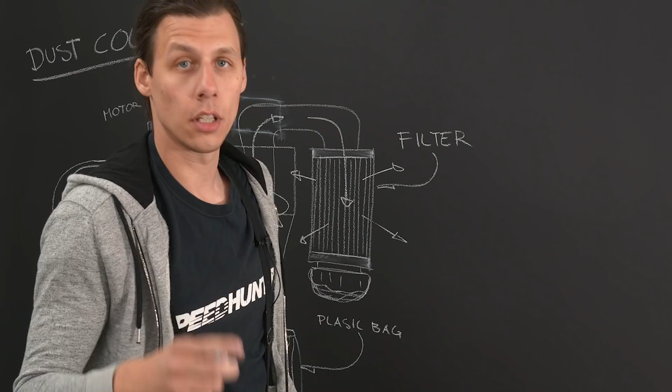Okay, so let's have a look at our dust collector setup and how we're gonna build it. I've tried to sketch out a rough layout of how this is gonna look.

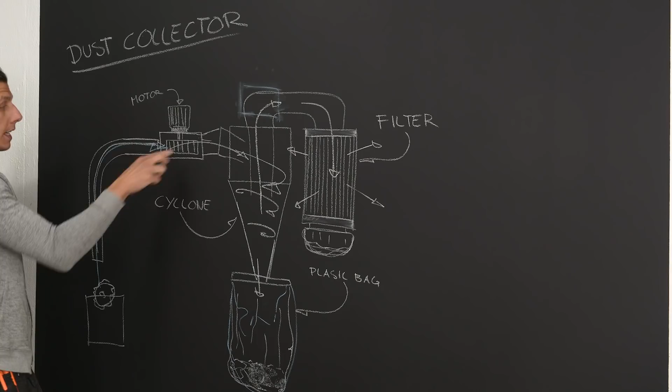The way our setup is gonna work is that down here we have a nice illustration of a table saw. The table saw generates dust, and that dust gets sucked up into the motor, which has a big steel-bladed fan on it. That fan then shoves all the dust particles into what's gonna be a dust cyclone, which we're gonna build, and we'll talk about that more later.

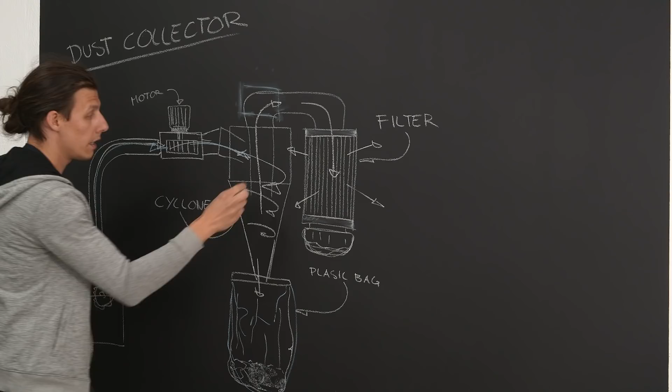The dust cyclone's job is to separate the particles from the air. It does that by spinning it around in circles, and then all the dust particles get pushed out to the wall and fall into a bag underneath.

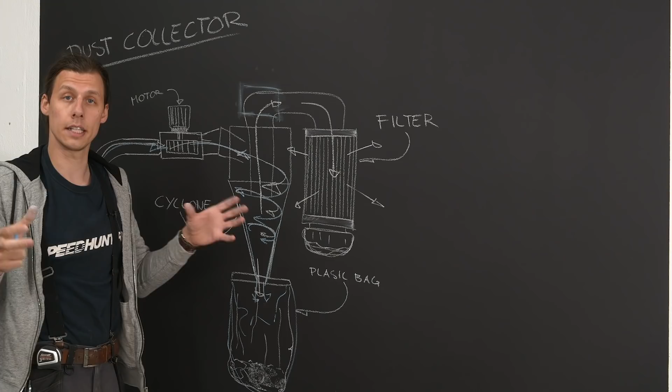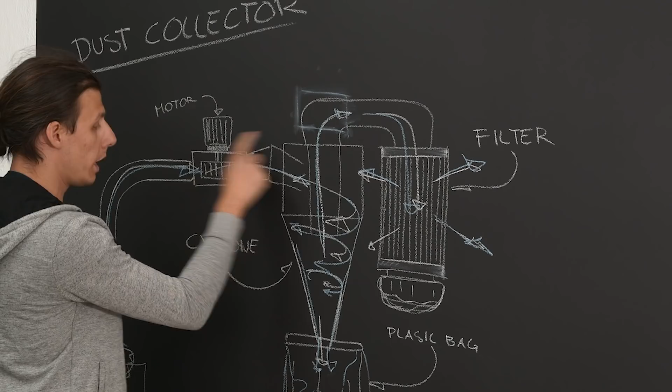The clean air in the middle of this contraption gets sucked up and forced into a big filter. All the really fine particles that make their way through the system and into the filter get filtered out right there, and they fall into this bag at the bottom here.

So then when the whole system is full, all we have to do is take off this bag and replace it with an empty one.

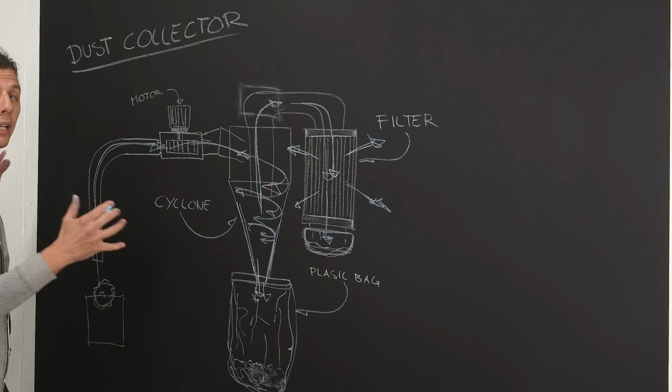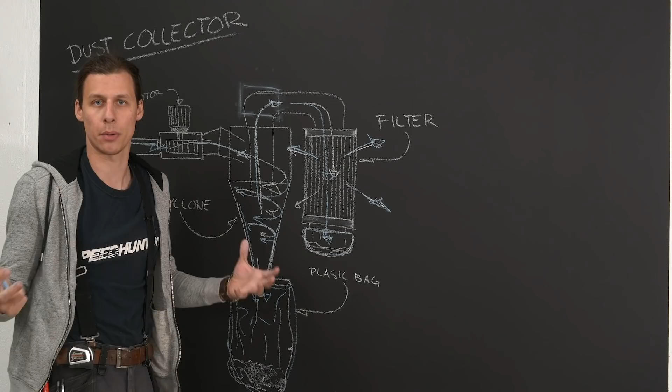We're gonna build it big enough so it can support our needs right now and hopefully all our future needs, with machines we might buy like a planer or other things that generate a lot of dust. Now that we know roughly how this is gonna work, let's look at the parts we have to work with. I'll show you a quick summary of how we're gonna build this.

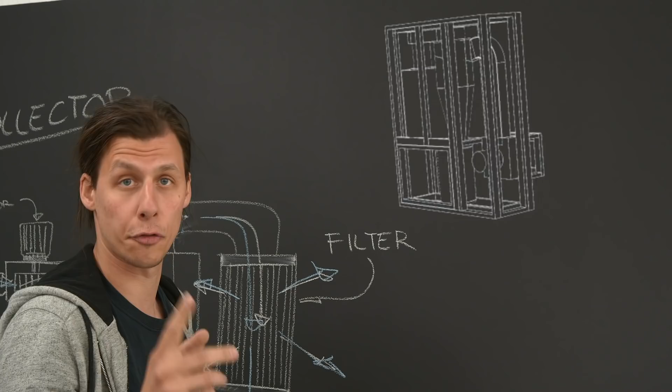We can divide the entire project into two parts. Let me show you. The first part is the frame and structure that holds everything, and the second part is all the special pieces inside that we need to fabricate.

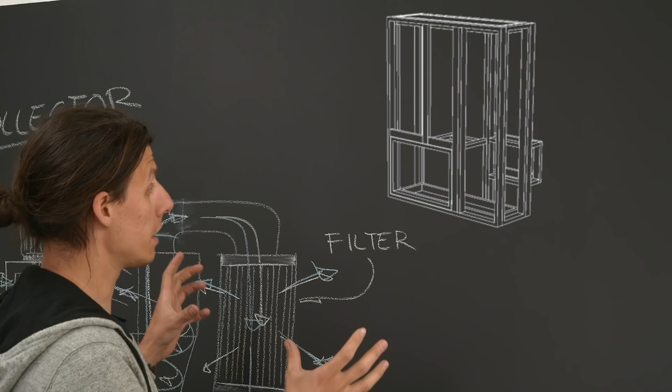The frame and everything you see right here is built out of 2x4s with sheet goods on the sides and insulation on the inside. That part I can build here, but there's a couple of pieces inside that I need to custom build for this project.

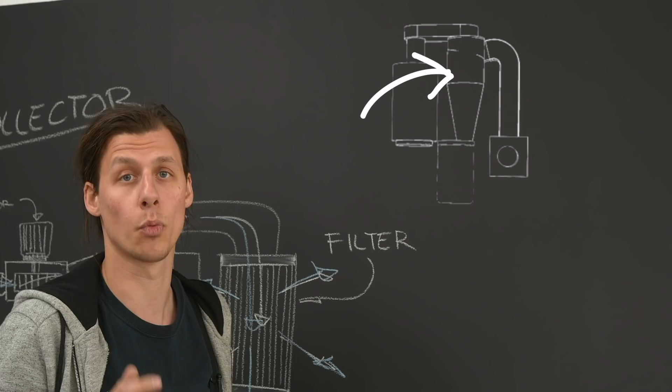One of those parts is the dust cyclone, which is built out of sheet goods, bent and welded together. I don't really have the facilities to build that here, so I'm gonna build that part at school, and then we'll bring all the parts back here and assemble them, and hopefully everything should fit together.

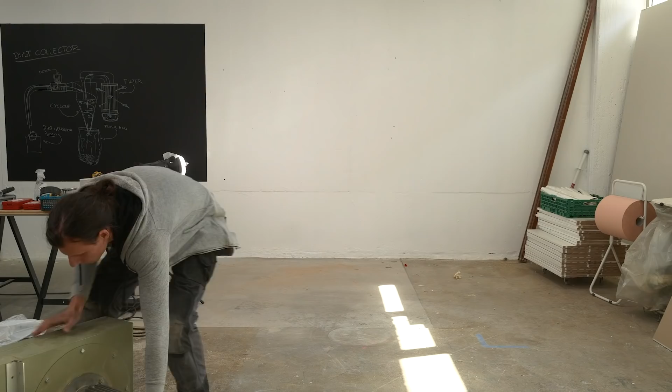Okay, so these are the parts that we've got to work with. This ginormous thing is half of an old dust extractor.

It came with a base that Simon and Lucian have now converted into a work table. What this used to be was just a massive motor with a fan in it.

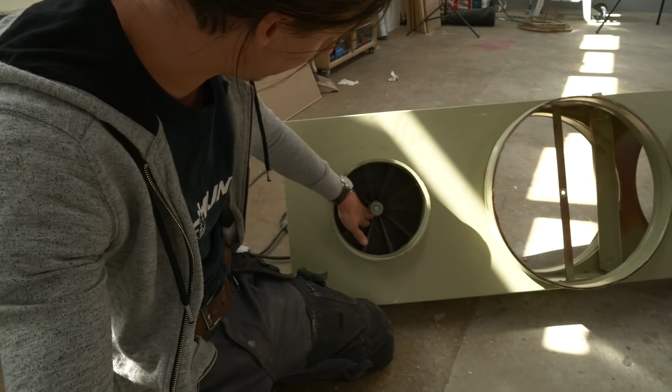So this big motor on the backside is directly connected to a big metal fan that sucks in the air and pushes it out through the side here.

Actually, that part of this entire box is the only thing we'll end up needing. We're gonna cut it off right here and just use the motor housing portion of this frame in our setup.

We're also gonna cut off a couple of these rings because they're super convenient, and we're gonna mount them to the bottom side of the filter and the cyclone to strap our waste bags to. We also bought one of these giant filters, and they're gonna be doing the filtration of the air to take out the very fine particles.

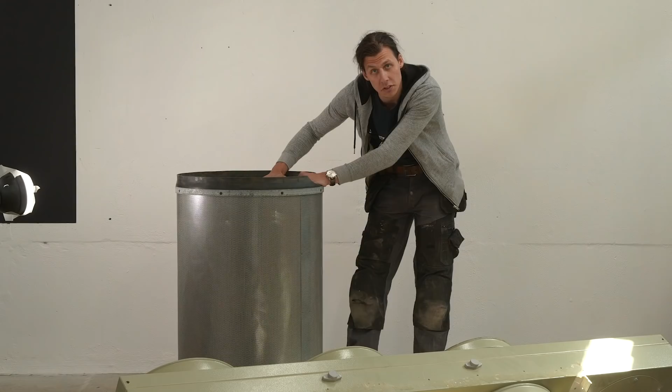There's a paper filter on the inside here, and the surface area is really big, so hopefully we should get a good airflow through the entire system.

So we made our way down to the metal workshop, and our plan now is to make that dust cyclone. I've 3D modeled it, and I've got all the parts laid out.

The next step now is to take the drawings that I've got and draw them on 1:1 scale on this piece of paper, cut them out, and then transfer it onto this piece of 1mm galvanized steel.

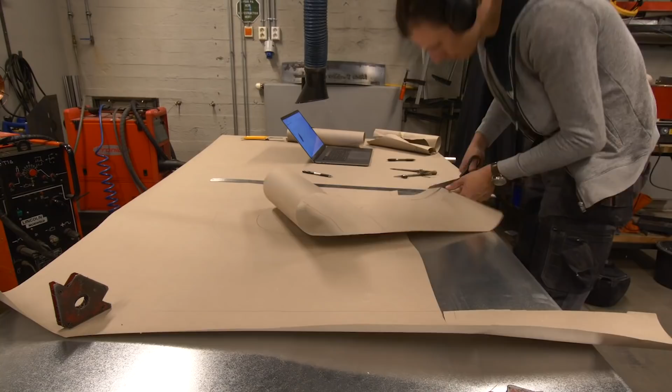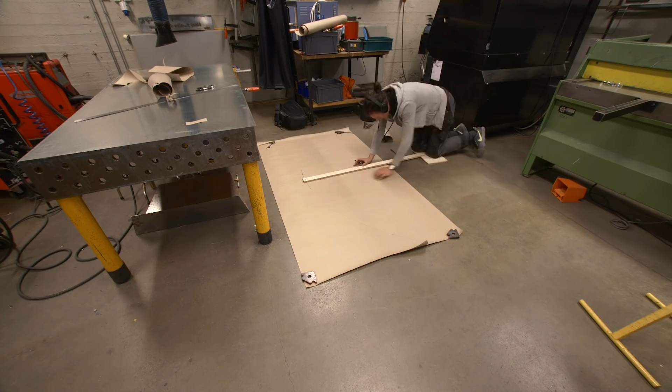Alright, that's 3 of the 4 templates cut out, and since these are now made out of paper, we can move them around and try to fit them as good as possible to the sheet so that we can utilize most of it. With any luck, it looks like we'll actually be able to fit all 3 pieces on one sheet. That means the whole cyclone will only take 2 sheets.

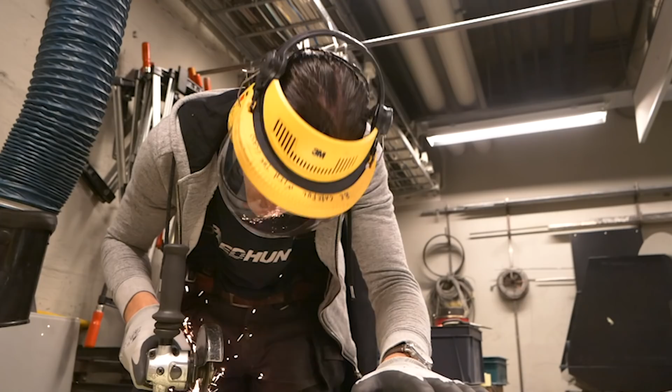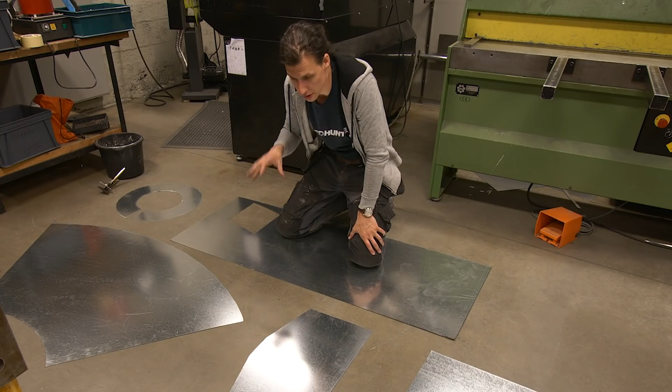That was all the cutting. So now that all the pieces are cut out, the next step will be to shape these pieces into what is going to become the cyclone for the dust collector. I think we'll just get to it.

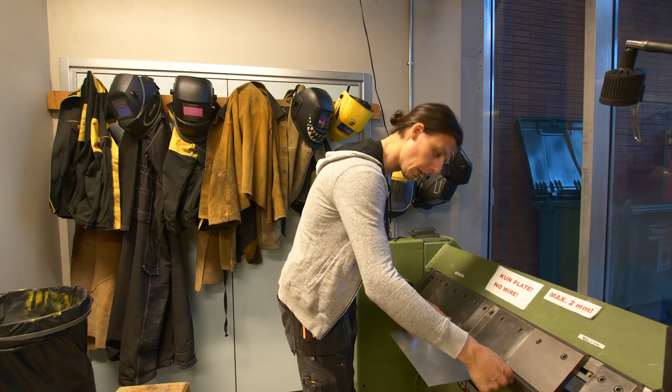All right, we're over by the bender now. So we'll just put this in, line this up to the mark. There we go, and then it should bend. And there we have it. That's the first bend.

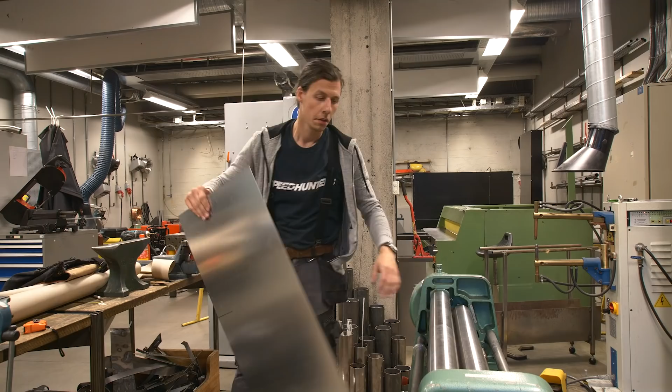Haha! That worked out way better than I expected. Next up, rollers. The way this tool works is that it rolls it in between these 3 metal rollers. We're gonna start out by practicing on this piece, which is gonna be the inner tube.

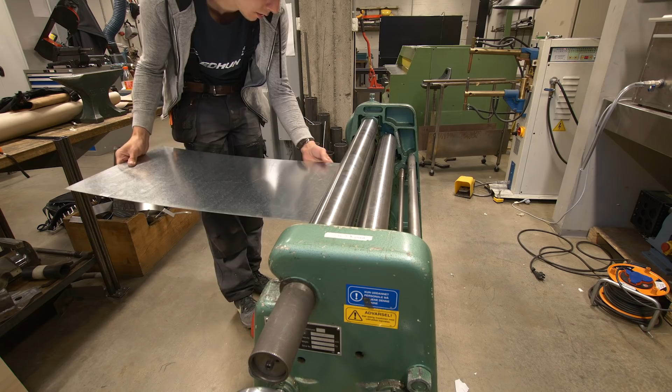Okay, and now hopefully... ta-da! It's rolling. So we're doing this until it's round.

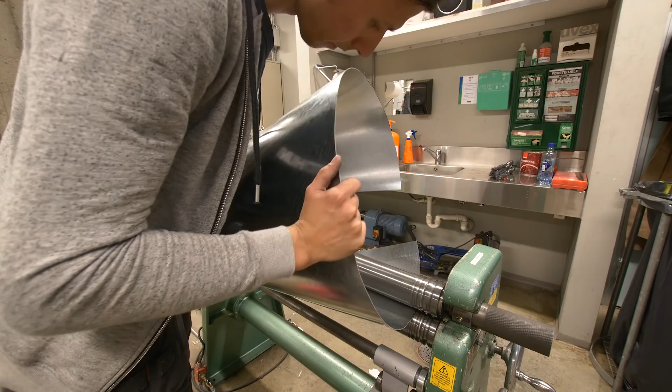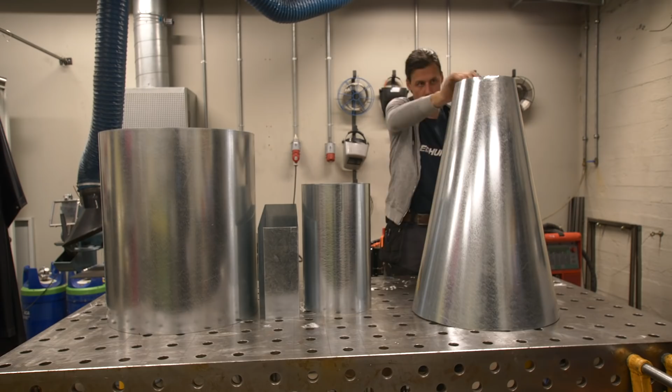That's all the pieces done. That cone was a lot more difficult than the normal cylinders. I don't really know how you're supposed to do this. Maybe one of you knows.

Anyways, next step is gonna be to tack weld these together so that they can maintain their shape and not be all floppy. Right now, the edges don't meet perfectly, but I think I can force them into place and then weld it together. So one note before we get started.

This is galvanized steel. What that means is that there's a protective coating on the outside that makes it rust resistant. That coating, when it gets warm from the welding, will release toxic fumes. So it's really important that if you're gonna weld this, be sure to wear a mask. So let's get started welding.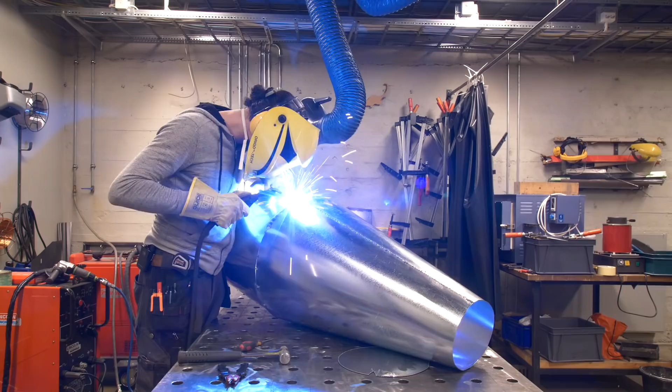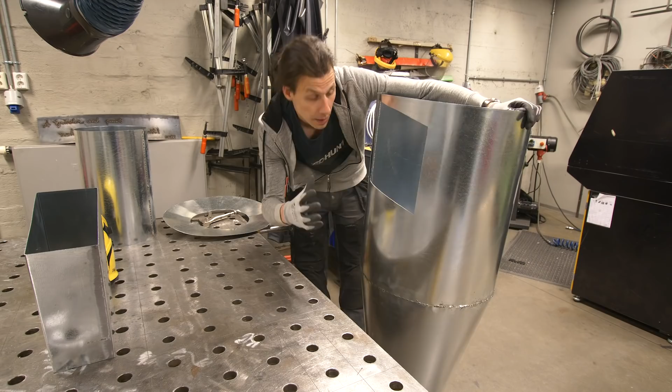It took a little bit of convincing, but the two parts are finally welded together. The next step now will be to weld on the inlet, which hopefully should fit in like this for the air and the dust to go in here.

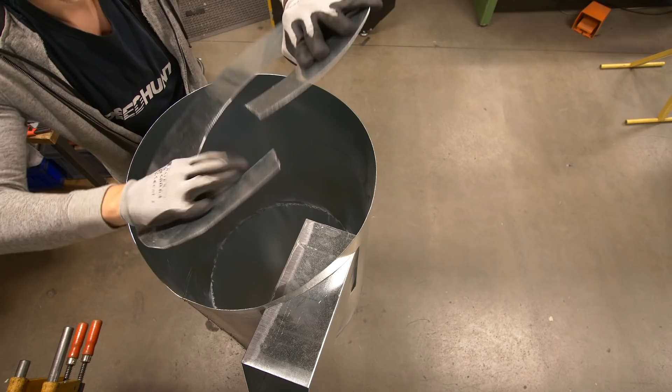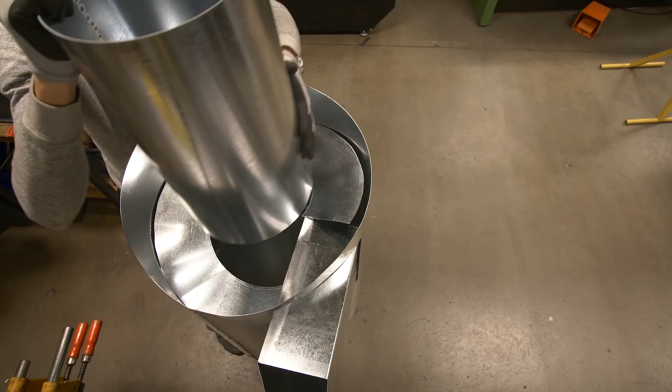And then once we get this part welded in, the last part will be the spiral, which is gonna go in here, and the spiral is gonna go from the top of the inlet and then circle around all the way to the bottom here so that the air moves around and spins and comes out underneath here. And then at the very end, this tube is gonna go in through the middle. All right, so next up, welding on the inlet and the spiral.

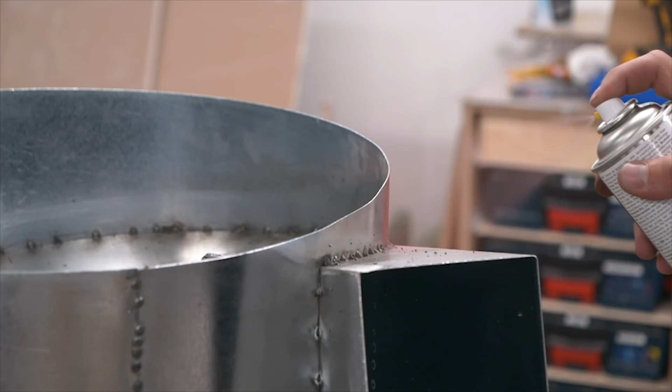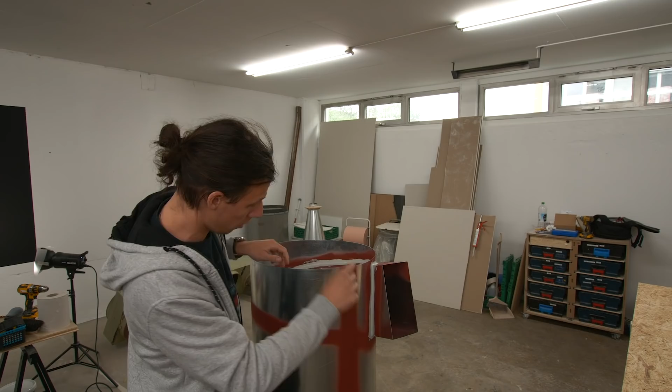So we're back in the workshop, all the metalworking is finished, and this guy is done. I've sprayed a rust preventing spray on all the welded seams. I've also gone over and taped up all the seams. What's left to do on this one is cut out the lid in wood that is gonna hold this inner tube inside of here. Up next, we're gonna build a frame, and for that, we first need to cut a whole bunch of 2x4 pieces.